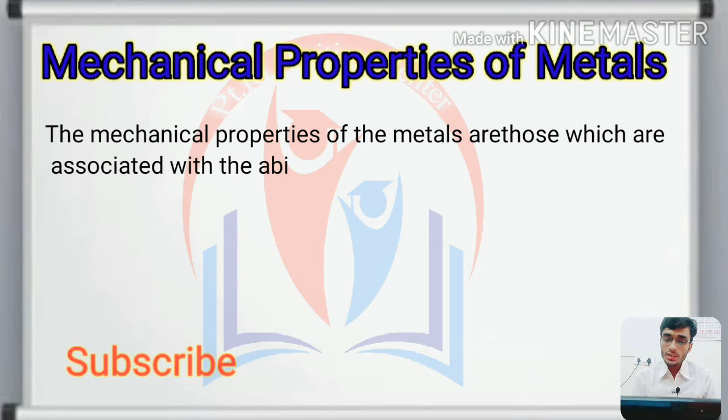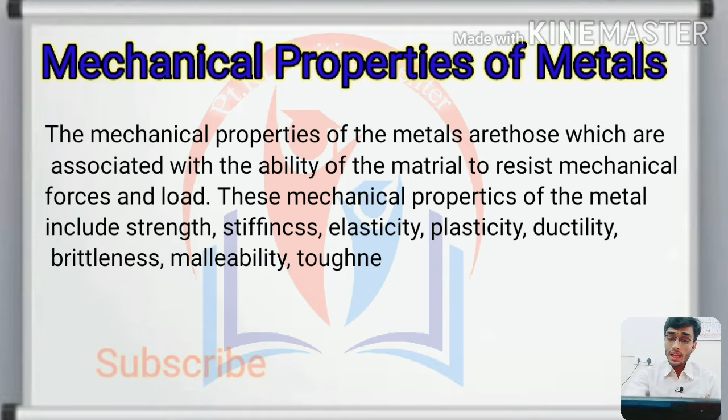Mechanical properties of metals are those which are associated with the ability of the metals to resist mechanical force and load. These mechanical properties of the metal include strength, stiffness, elasticity, plasticity, ductility, brittleness, malleability, toughness, resilience, creep and hardness. We shall now discuss these properties one by one in detail.

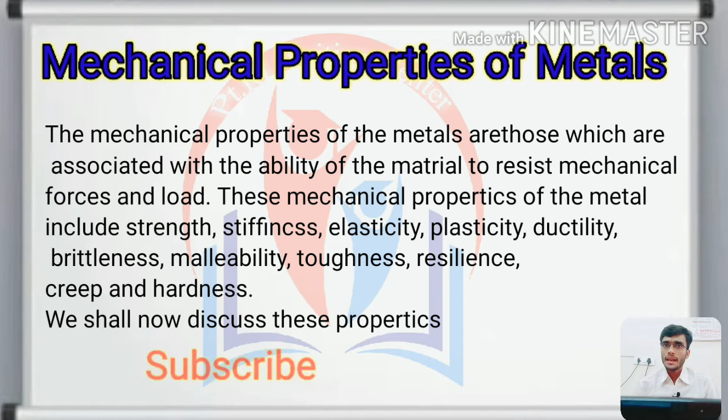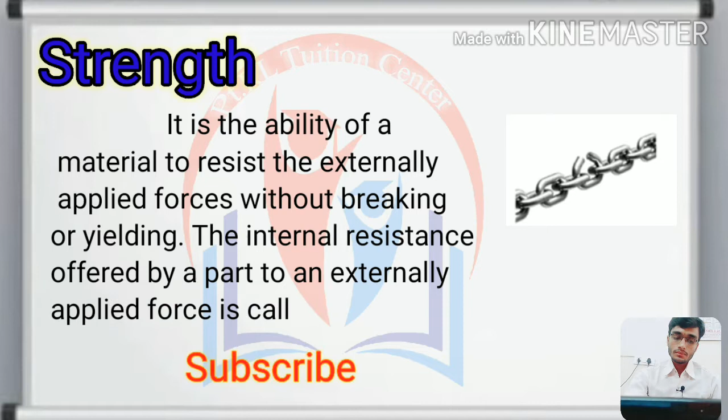Number one, the first property is strength. It is the ability of a material to resist the externally applied forces without breaking or yielding. The internal resistance offered by a part to an externally applied force is called stress. We have already discussed stress in the previous video of strength of materials in detail. To repeat: strength is the ability of a material to resist the externally applied force without breaking or yielding. The internal resistance offered by a part to an externally applied force is called stress. This is called strength.

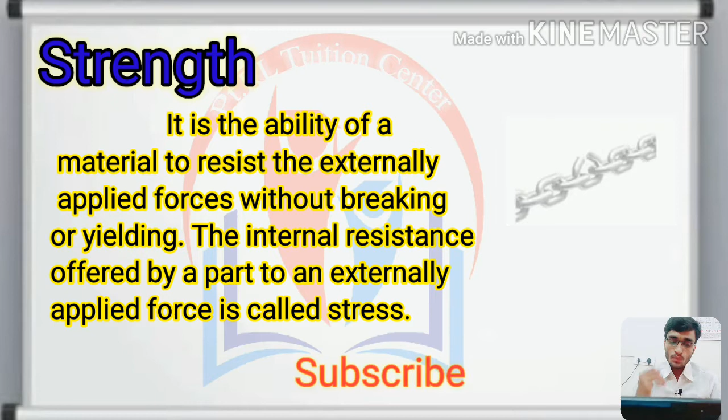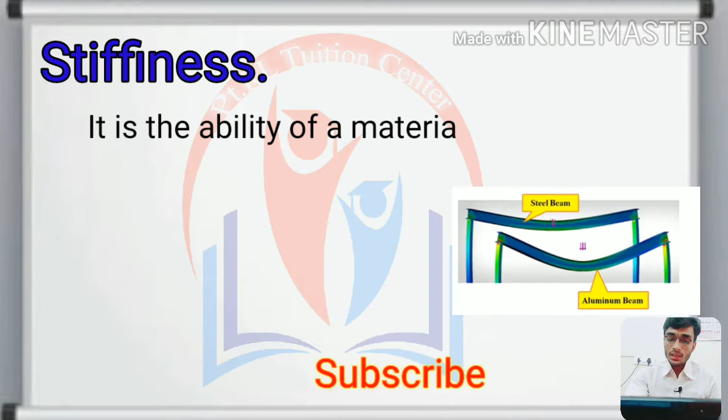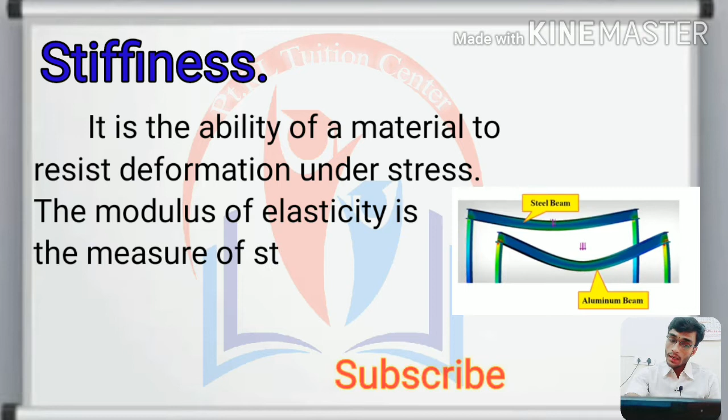Next property is stiffness. Stiffness is the ability of a material to resist deformation under stress. The modulus of elasticity is a measure of stiffness.

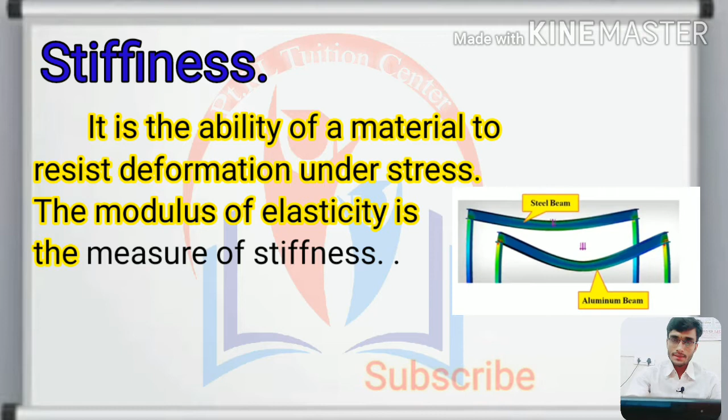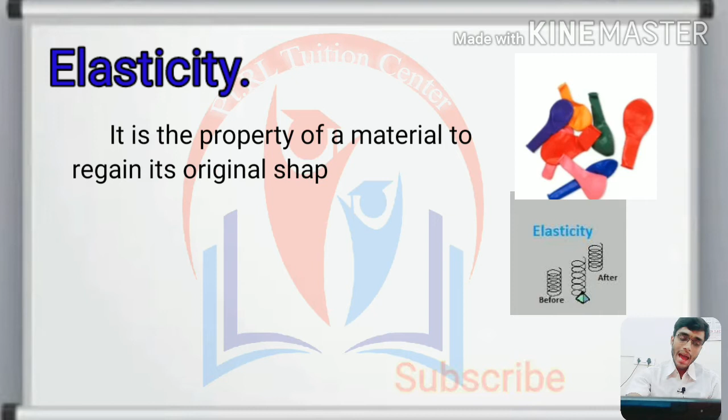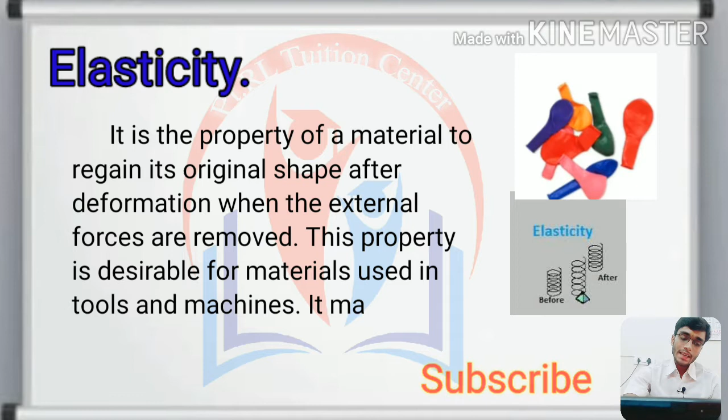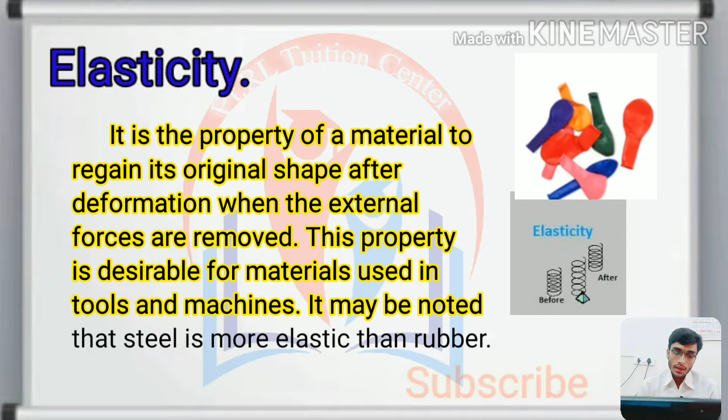Next point is elasticity. Elasticity is the property of a material to regain its original shape after deformation when the external force is removed. This property is desirable for materials used in tools and machines. It may be noted that steel is more elastic than rubber. To repeat, because it's an important property of metal: elasticity is the property of a material to regain its original shape after deformation when the external force is removed. This property is desirable for materials used in tools and machines. It may be noted that steel is more elastic than rubber.

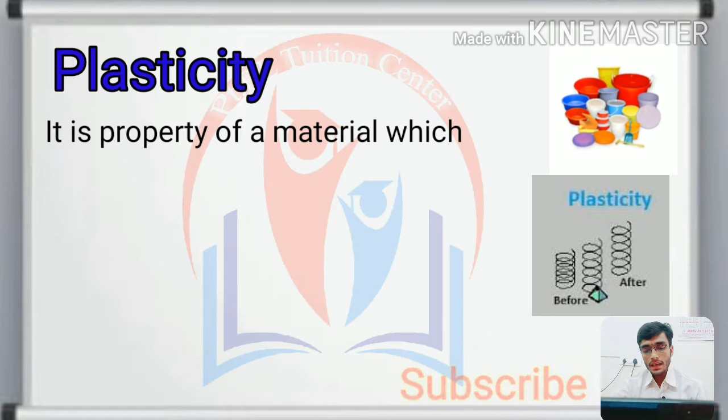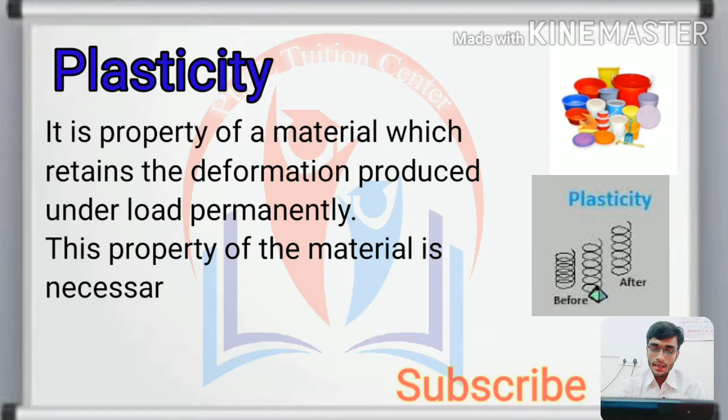Next property is plasticity. It is a property of material which retains the deformation produced under load permanently. This property of a material is necessary for forgings, in stamping images on coins and in ornamental work. It is the property of a material which retains the deformation produced under the load permanently.

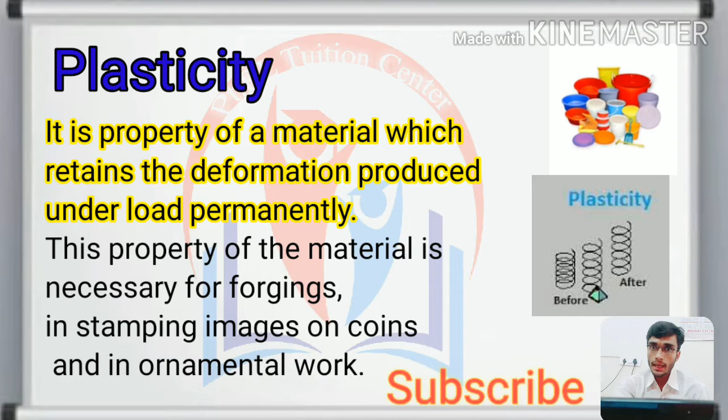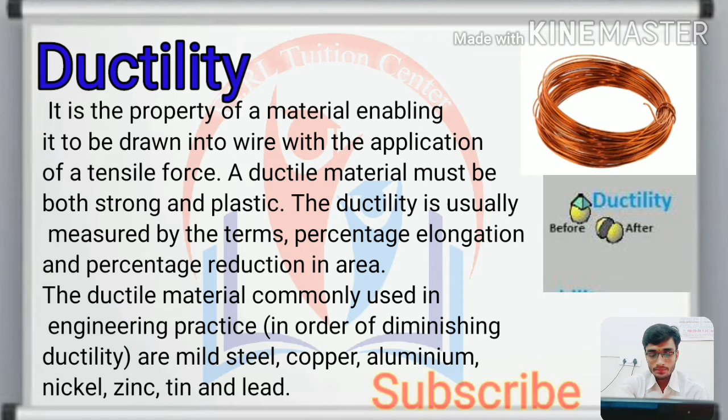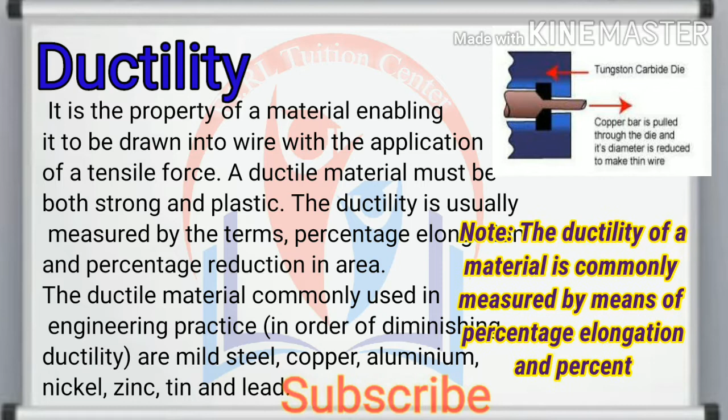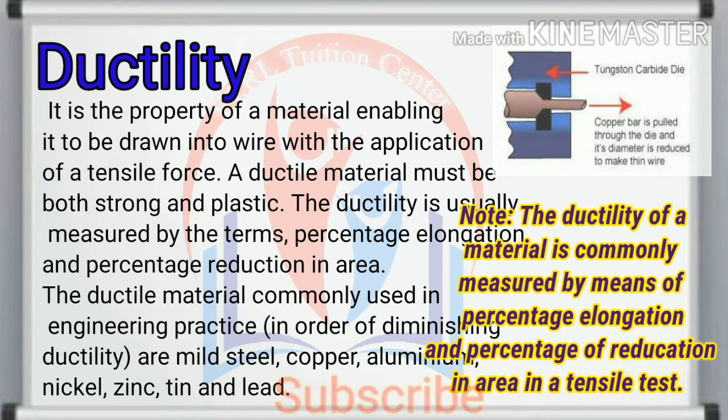Next point is ductility. It is the property of a material enabling it to be drawn into wire with the application of a tensile force. A ductile material must be both strong and plastic. Ductility is usually measured by the terms percentage elongation and percentage reduction in area. The ductile materials commonly used in engineering practice are mild steel, copper, aluminum, nickel, zinc, tin and lead. Remember, the ductility of a material is commonly measured by means of percentage elongation and percentage reduction in area in a tensile test. This topic has already been discussed in the previous video in detail.

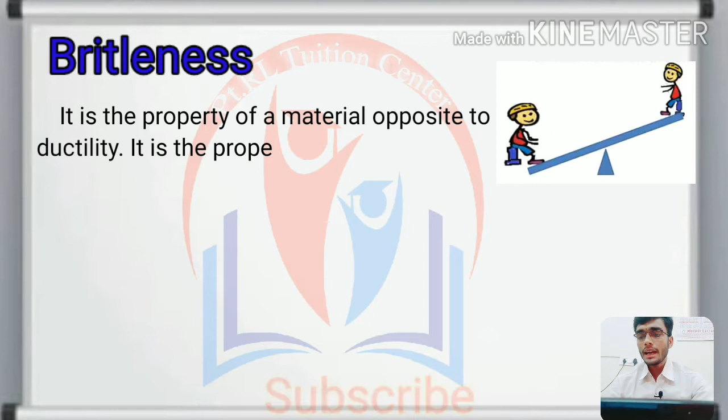Next point is brittleness. It is a property of material opposite to ductility. It is the property of breaking of material with little permanent distortion. Brittle material, when subjected to tensile load, snaps off without giving any sensible elongation. Cast iron is a brittle material.

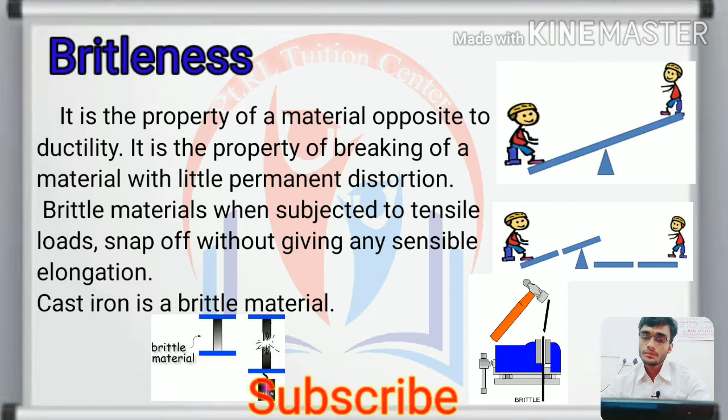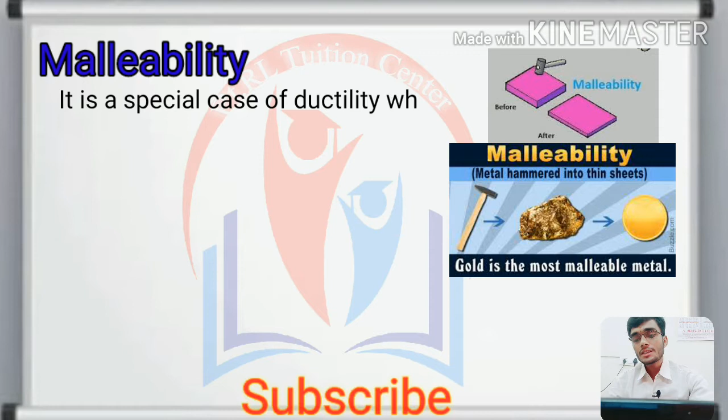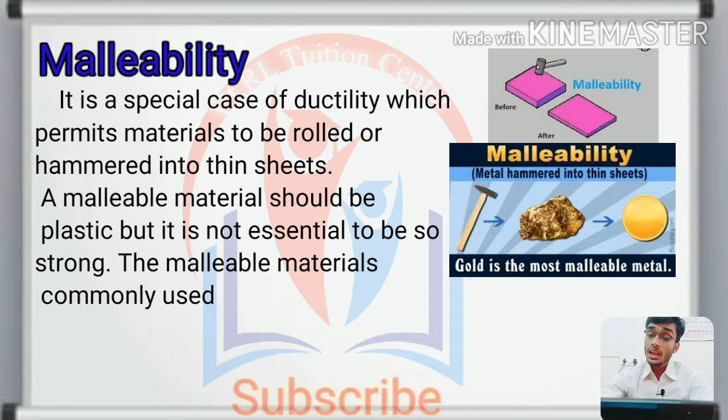Next point is malleability. It is a special case of ductility which permits material to be rolled or hammered into thin sheets. A malleable material should be plastic, but it is not essential to be so strong. The malleable materials commonly used in engineering practice, in order of diminishing malleability, are lead, soft steel, wrought iron, copper and aluminum.

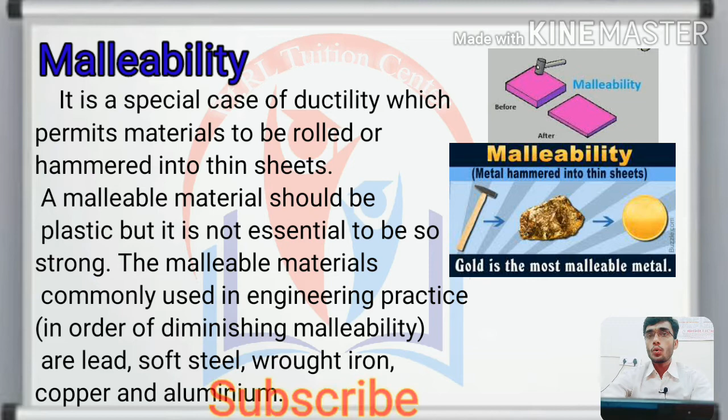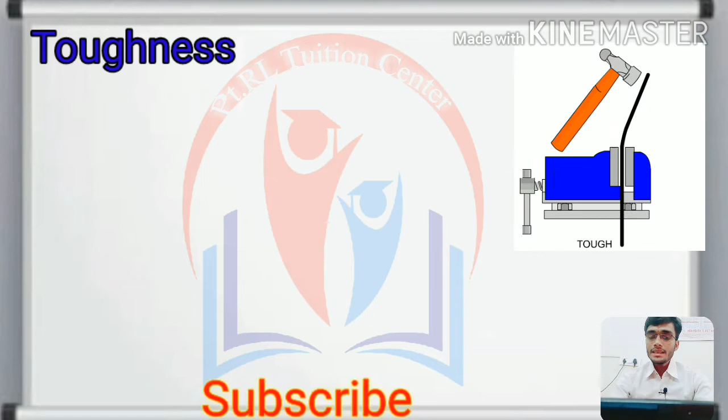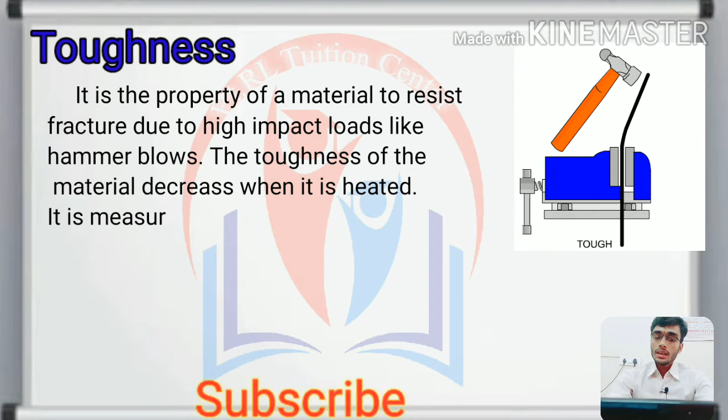Next point is toughness. It is a property of a material to resist fracture due to high impact load like hammer blows. The toughness of the material decreases when it is heated. It is measured by the amount of energy that a unit volume of the material has absorbed after being stressed up to the point of fracture. This property is desirable in parts subjected to shock and impact load.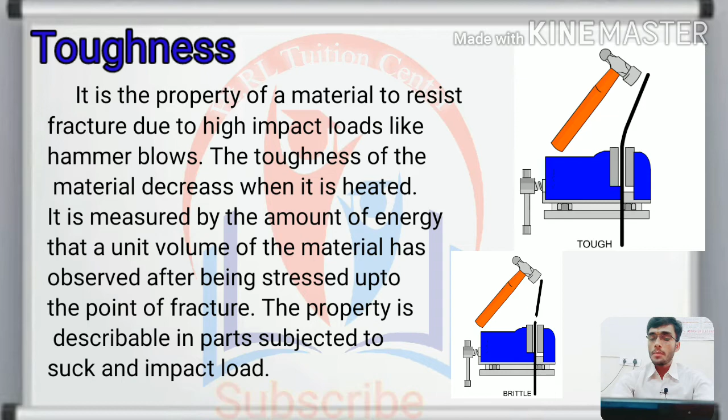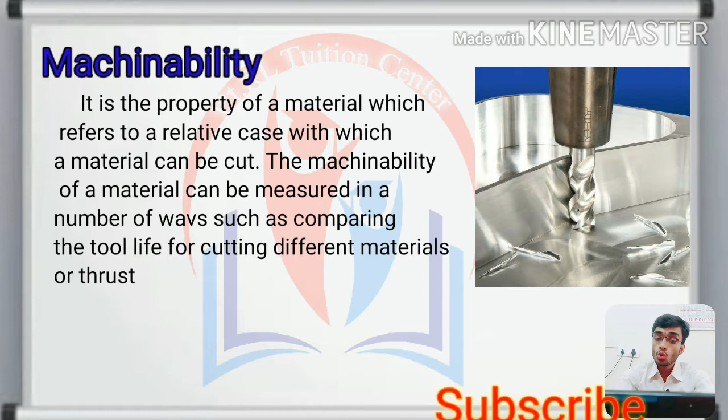Next point is machinability. It is a property of a material which refers to the relative ease with which a material can be cut. The machinability of a material can be measured in a number of ways, such as comparing the tool life in cutting different materials, or the thrust required to remove the material at some given rate, or the energy required to remove a unit volume of the material. It may be noted that brass can be more easily machined than steel.

Machinability is a property of a material which refers to the relative ease with which a material can be cut.

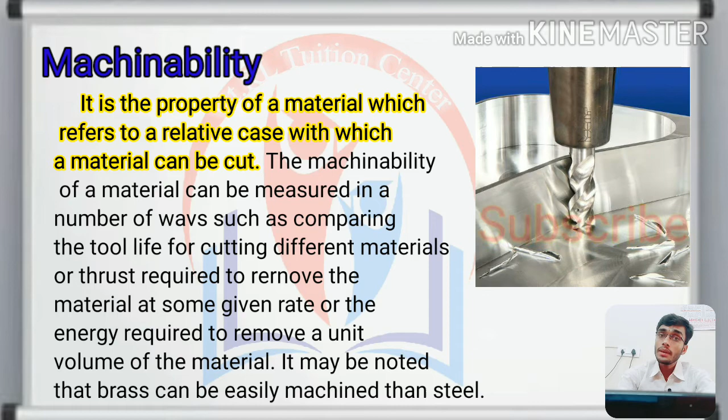Next point is resilience. It is a property of a material to absorb energy and resist shock and impact load. It is measured by the amount of energy absorbed per unit volume within the elastic limit.

This property is essential for spring materials. Again, resilience is a property of a material to absorb energy and to resist shock and impact load.

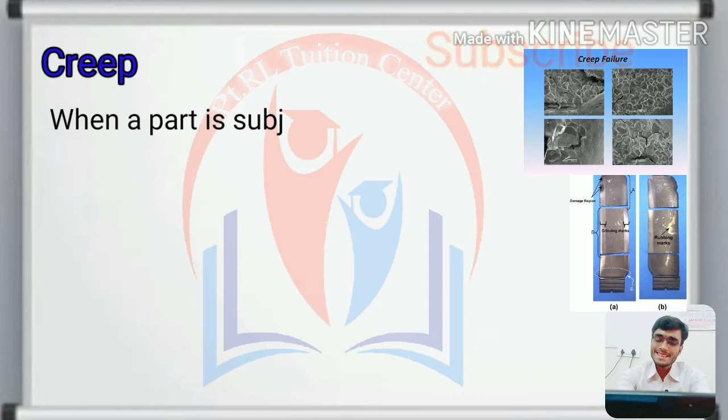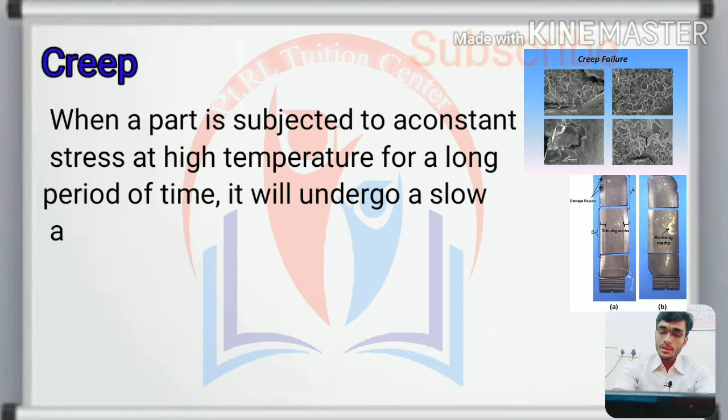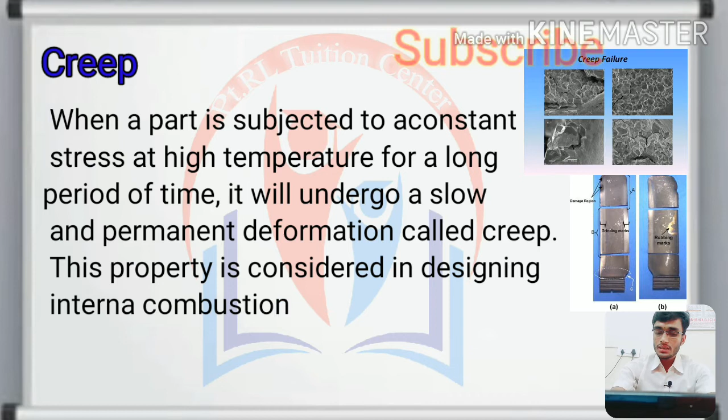Next point is creep. When a part is subjected to a constant stress at high temperature for a long period of time, it will undergo a slow and permanent deformation called creep. This property is considered in the design of internal combustion engines, boilers and turbines.

Repeat: when a part is subjected to a constant stress at high temperature for a long period of time, it will undergo a slow and permanent deformation called creep.

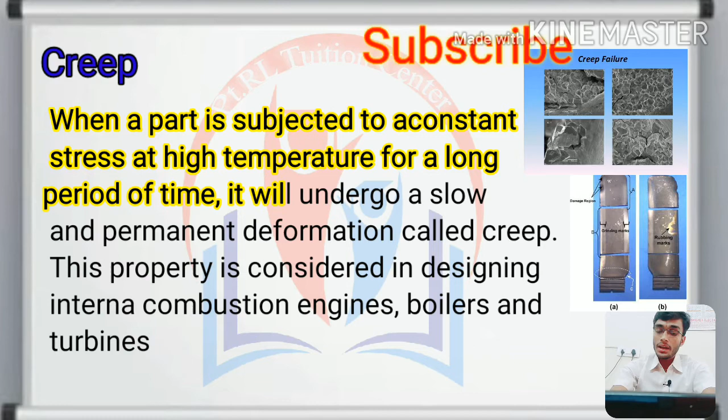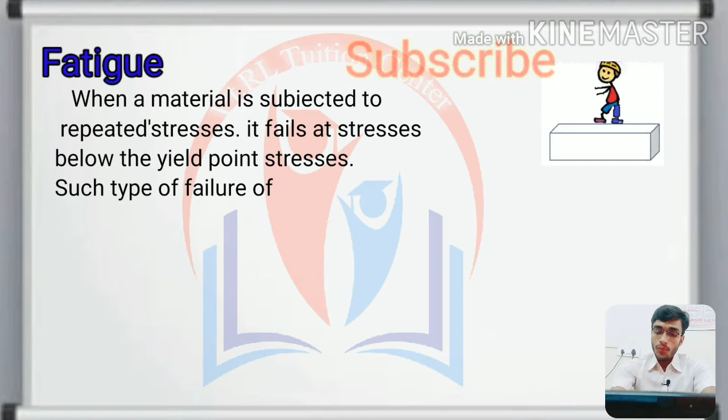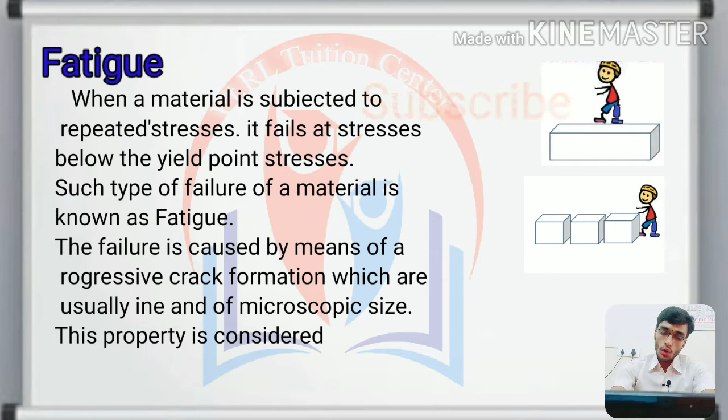Next point is fatigue. When a material is subjected to repeated stress, it fails at a stress below the yield point stress. Such type of failure of a material is known as fatigue. The failure is caused by means of a progressive crack formation, which are usually fine and of microscopic size. This property is considered in designing shafts, connecting rods, springs, gears, etc.

Again repeat: when a material is subjected to repeated stress, it fails at a stress below the yield point stress. Such type of failure of a material is known as fatigue.

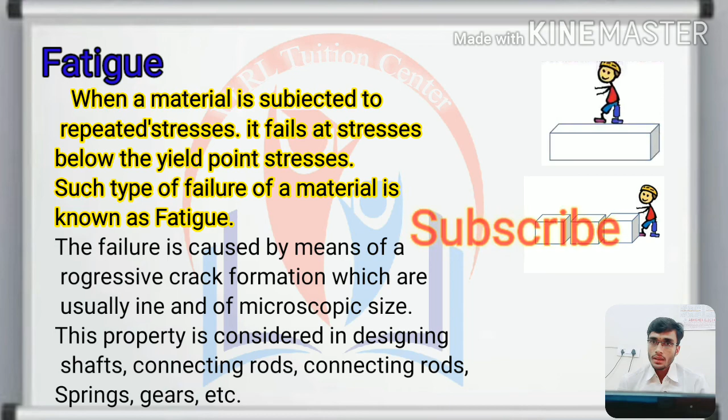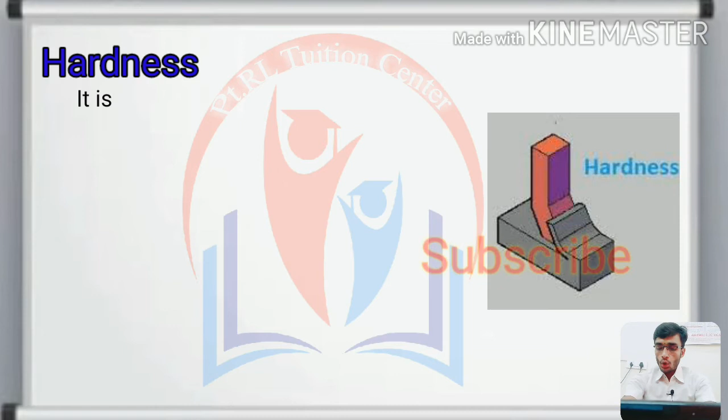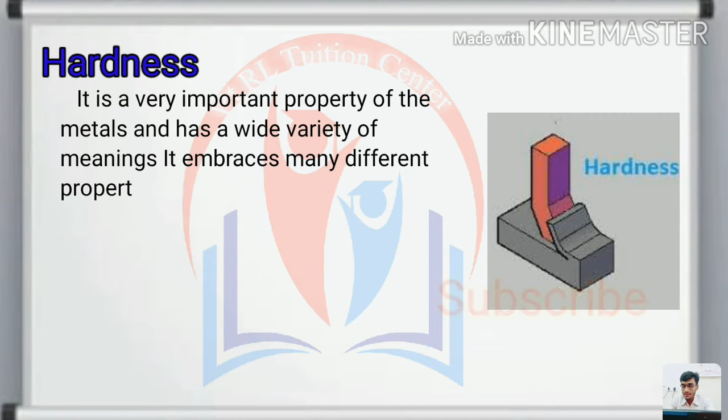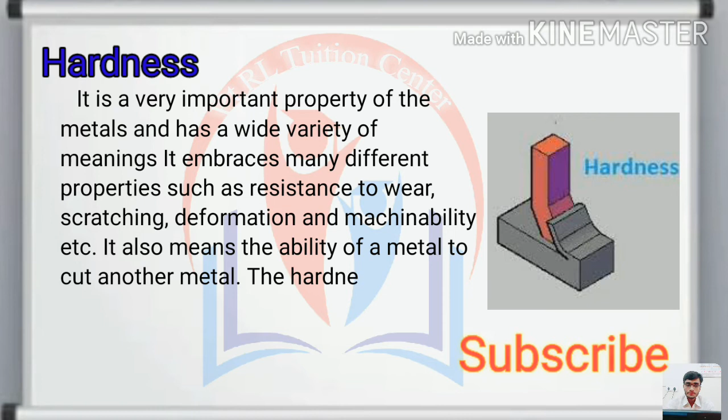Next and last point is hardness. It is a very important property of a material and has a wide variety of meanings. It embraces many different properties such as resistance to wear, scratching, deformation and machinability, etc. It also means the ability of a material to cut another metal. The hardness is usually expressed in numbers which are dependent on the method of making the test.

The hardness of a metal may be determined by some tests. Number one is the Brinell hardness test.

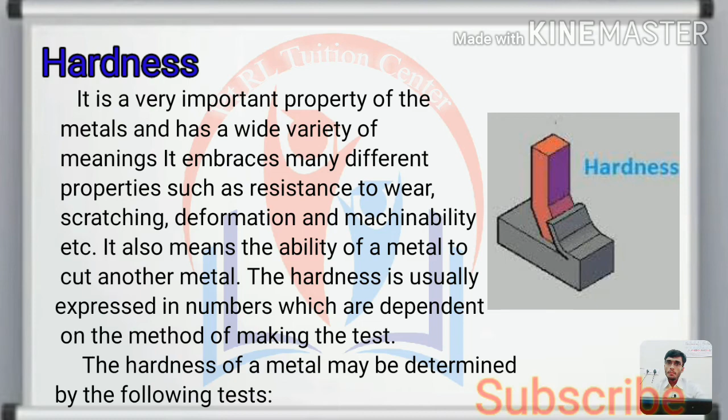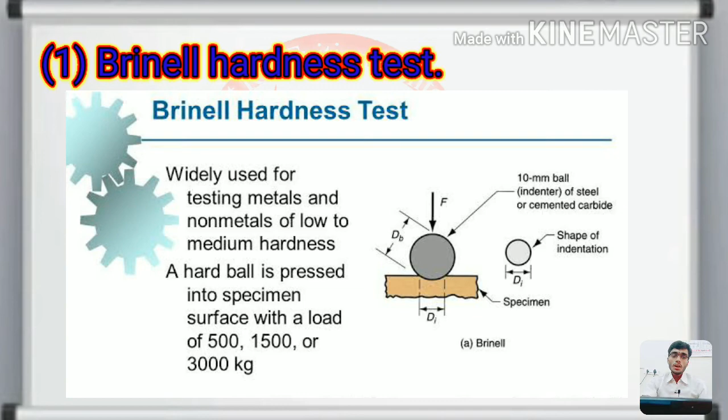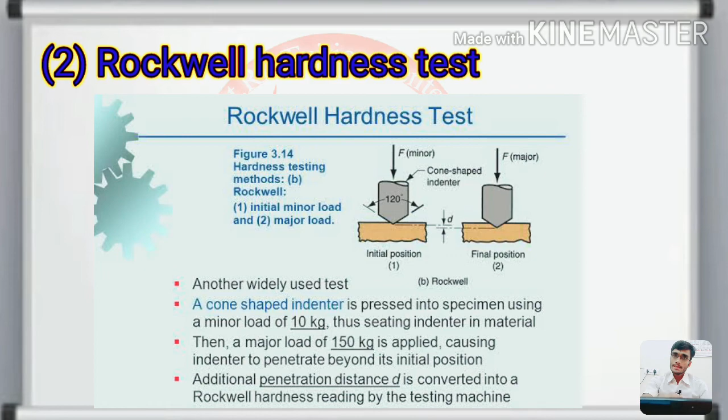Number one is the Brinell hardness test. Number two is the Rockwell hardness test. And next is the Vickers hardness test.

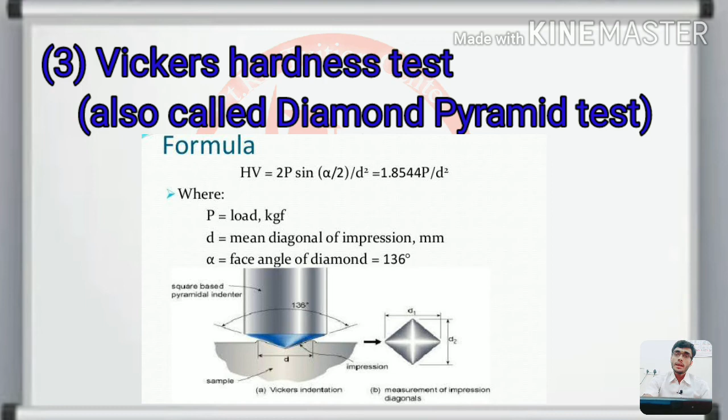It is also called the diamond pyramid test. And the last one is the Shore scleroscope test.

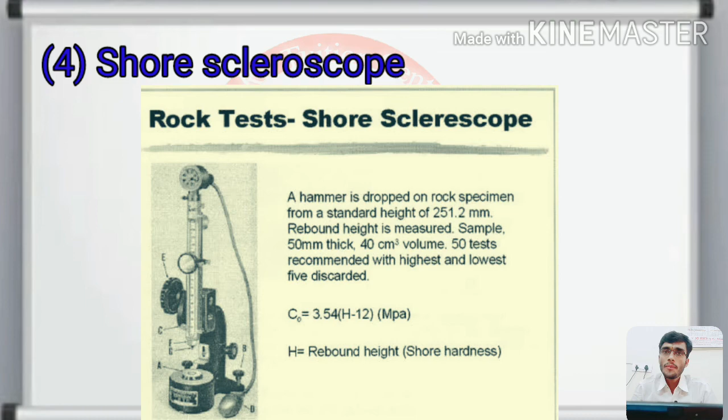I hope you are clear on this topic. If you have any doubt, you can comment in our comment box and ask me your doubts.